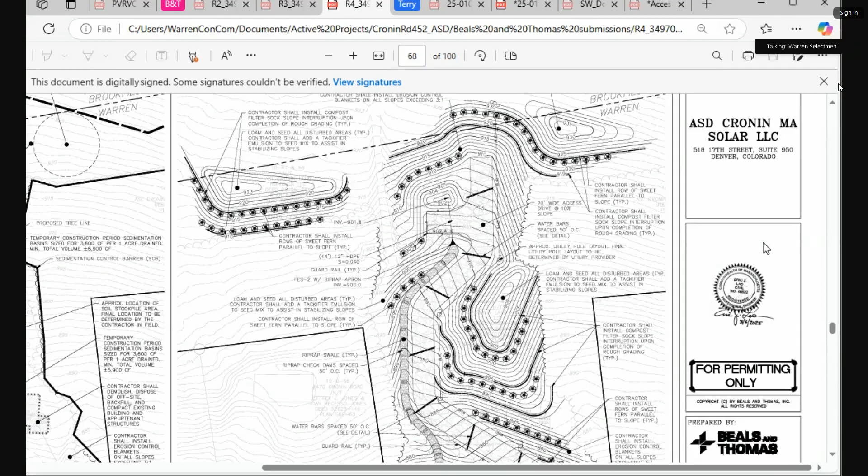Is the commission amenable to me reading Mr. Reynolds' remaining comments and talking through our proposed responses? Yeah, sure. Why don't we start with... I have, I can just — that is not it, this is it. I color code everything to help me out. Very good, because that's what we do.

That's what we learn at MACC conferences, right? I even do it on my documents. Oh, I did, yeah, so we'll focus on the yellow comments.

So we have general design analysis comment 1 still pending. Mr. Reynolds indicates that while the subject parcel boundaries have been revised, no subcatchment boundaries or routing is shown for the proposed solar project discharging to the Cronin Road site.

So we will be submitting updated subcatchment boundaries that do depict the area draining from the offsite portion of the separate solar project — the portion that would potentially direct water towards the town of Warren. That is going to be depicted on the next subcatchment drawings that we have, and we will submit those to Mr. Reynolds for review in accordance with this comment.

We'll have the pre-development and post-development conditions watershed maps — figure 1 and figure 2 — that will be resubmitted to address this comment. So I stated this in my email to you.

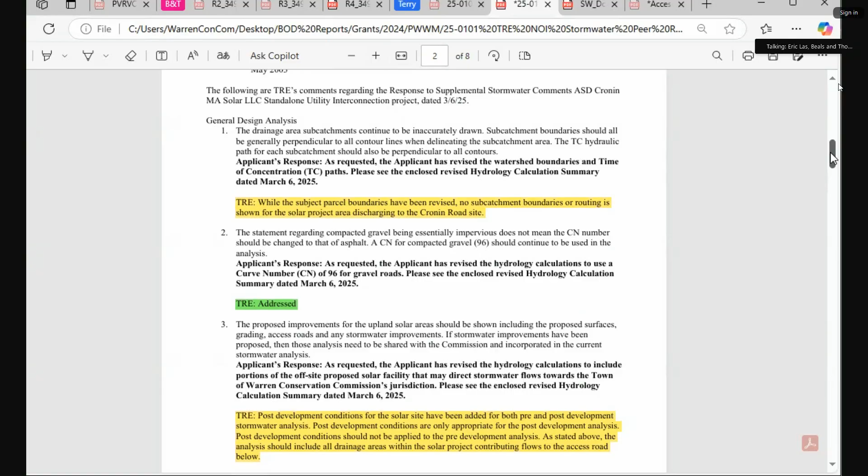So we're happy to convey that, but we don't want to initiate a whole new review of another project that's in a different municipality. That is not our applicant's intent - absolutely not. Our intent is just so you can demonstrate to us - that's exactly what we were looking for.

We need to be sure that we're all on the same page, and that small basin is going to accommodate what's coming onto the site. That's it. We're confident that we can demonstrate that to the commission and hopefully address your concerns about that.

Fantastic. All right, so I'm going to skip number 2 because it's addressed. Number 3 is the proposed improvements for the upland solar area should be shown, including the proposed surfaces, grading, access roads, and any stormwater improvements.

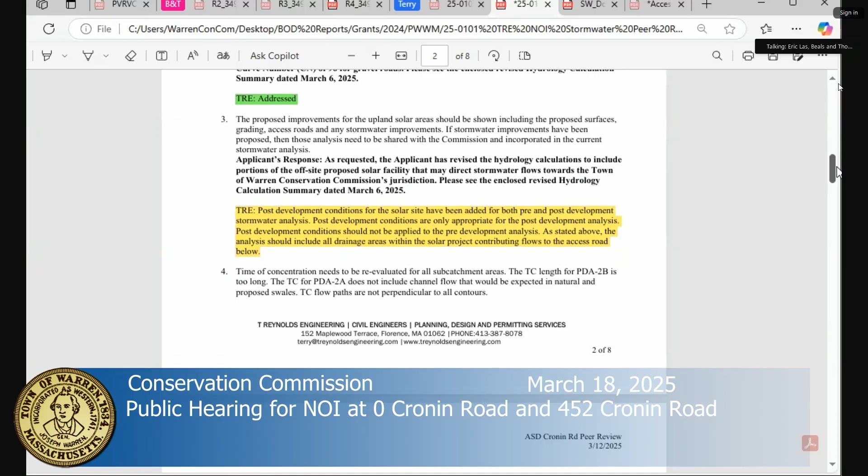It's stormwater. This one, I think - the previous comment, I guess it could have been interpreted more than one way. The way we interpreted it wasn't the way that Mr. Reynolds had intended us to interpret it.

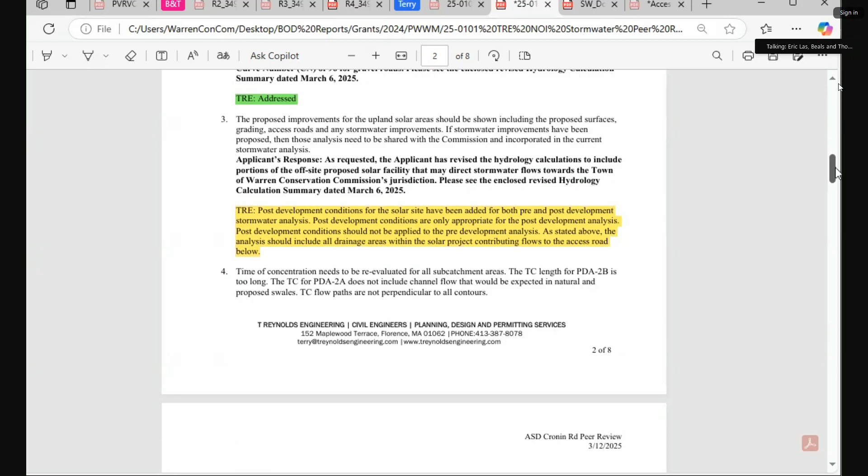So what we are going to do, basically, is show the offsite area to the east of the project, up gradient, in its current state without solar, since there is no solar up there. Then we will show in the proposed conditions that there would be solar there. That is the change we'll make, and we will provide the revised hydrology calculations in our submission later this week. This is really a different side of the same coin.

Numbers 4 and 5 have been addressed. And number 6...

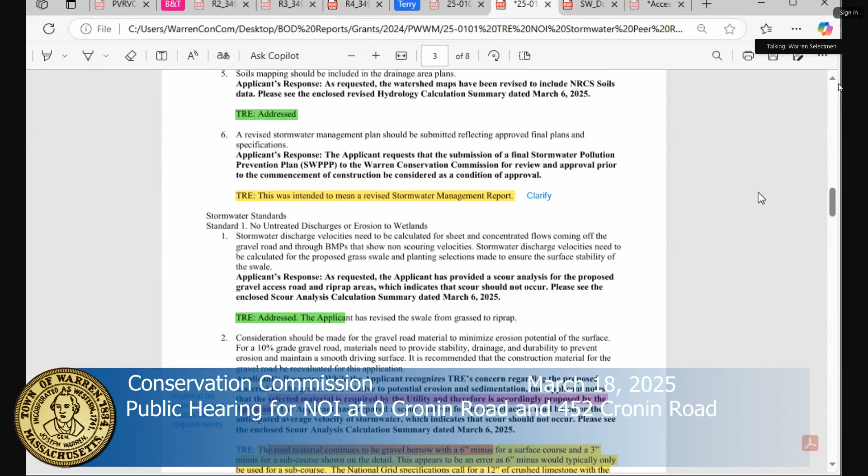Terry, if you are here - the stormwater management report, this was intended to mean a revised stormwater management report. Can you clarify what you were looking for?

This is just, as things are changed, the calculations are changing, the results are changing. The overall report, the document that you're going to put into your file, should be updated in entirety. That way, when people come back and refer to it, they're referring to what was finalized, not iterations.

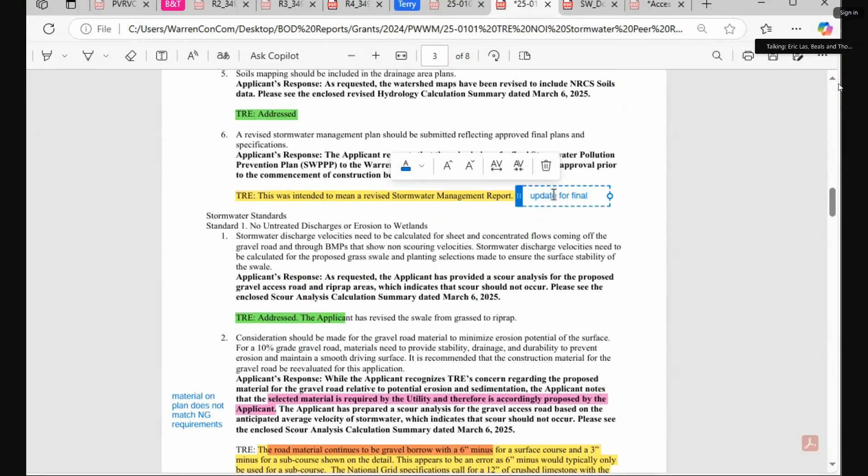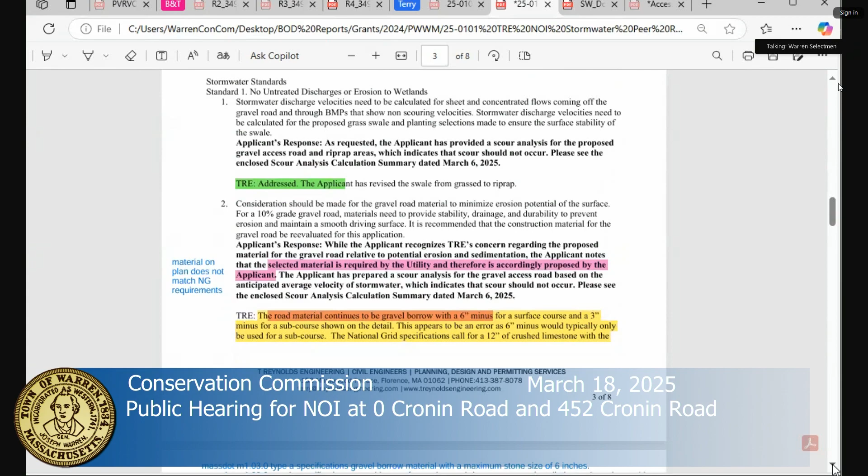Ah, right, okay, yes - that was our intention, commissioners, to submit that. I just wanted to make sure we were on the same page with that. Thank you. Stormwater standards, number 1 is green is go.

That means it was met. Number 2, consideration should be made for the gravel road material to minimize erosion potential. I'm not gonna read the whole thing. Ultimately, they're looking for - I understand that you have requirements from National Grid about the road material.

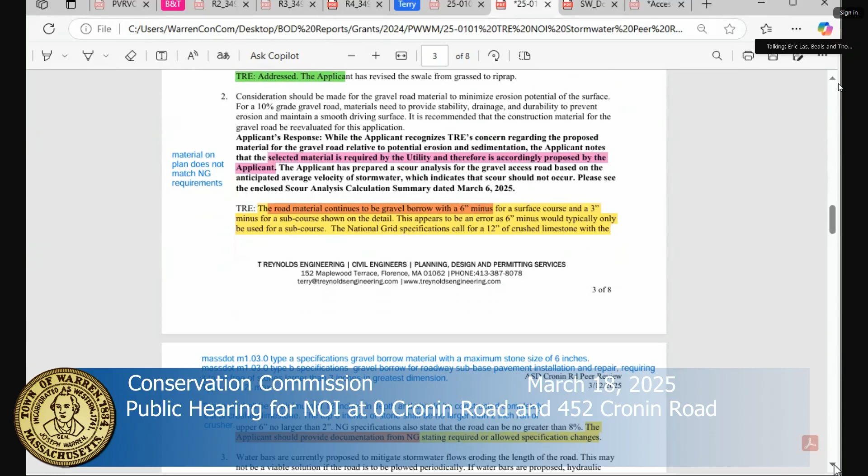Yes, the detail has been updated, Commissioners, to exactly match the spec from National Grid. I think there was one aspect of it that didn't match, and that has been updated.

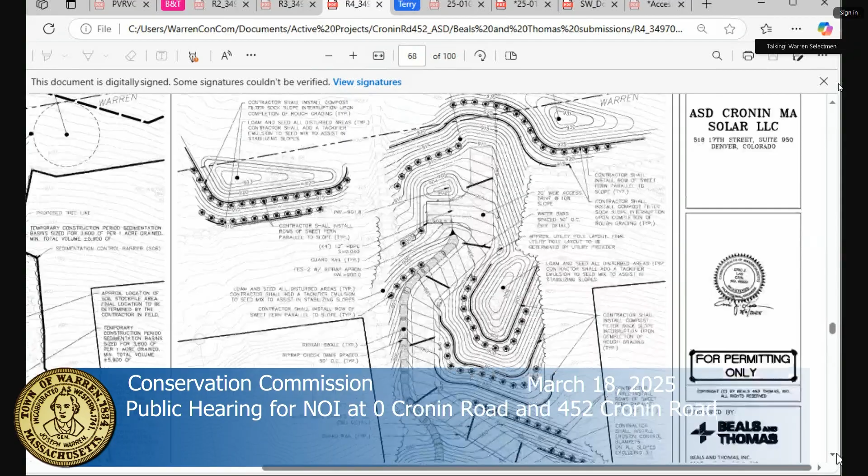Well, I didn't mean to do this. I had it sitting exactly on the spot right here for the road, and I think that I'm not sure if I agree with that. How do I get out of this, I need to be able to move this over. Oh, here we go, okay.

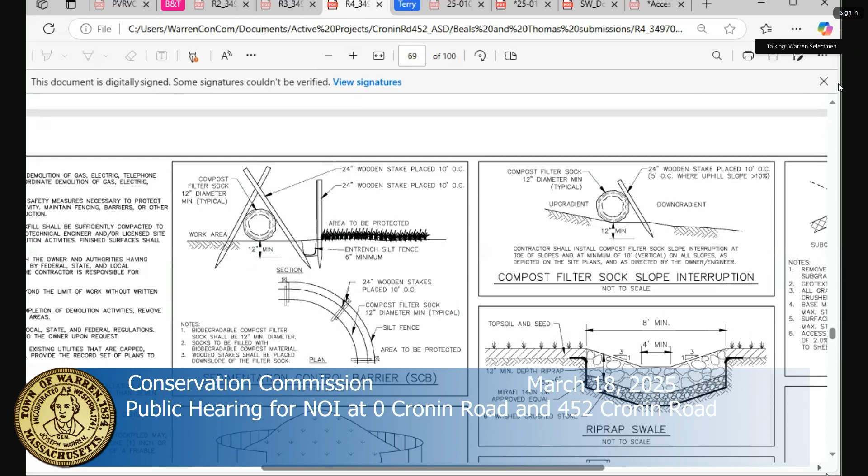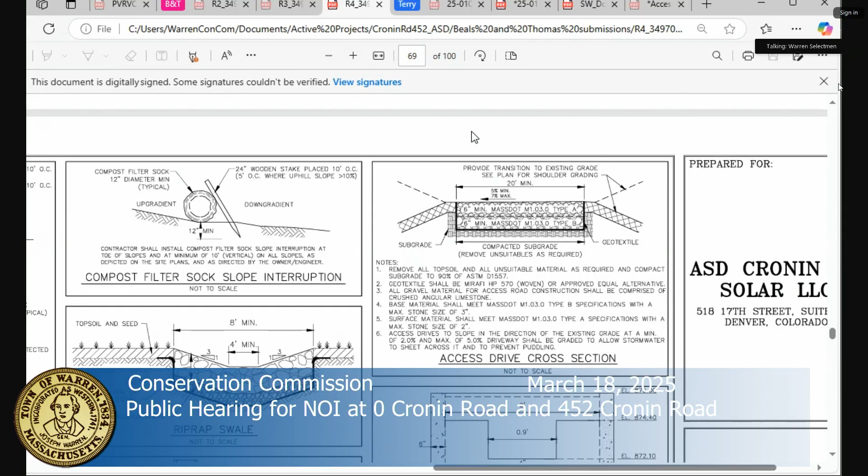So, my concern on this is that this drawing is fantastic because it shows the 6 and 6, right? From my experience, when people are on site and they're looking at a project, they're gonna go with a picture before they go with the words. It's just easier. But MassDOT M1.03.0 Type A and Type B refer to borrow and not to...

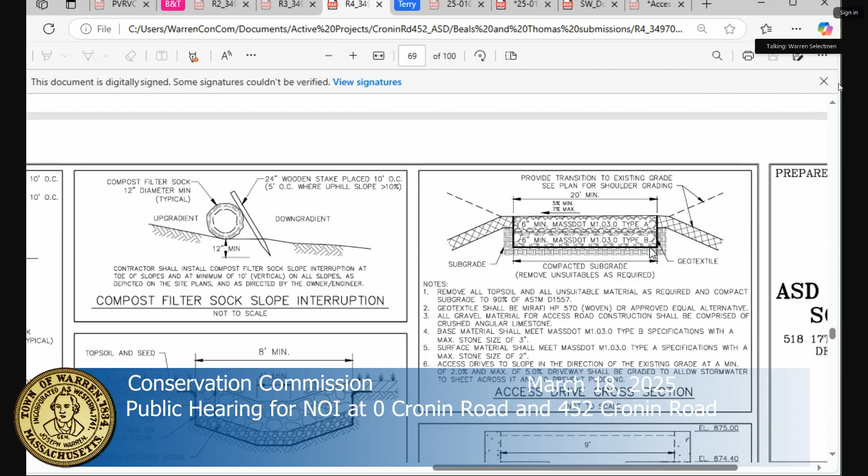Oh gosh. What is... crushed stone. Crushed stone, right, or crushed limestone. Crushed limestone specifically. So this here, if you can see my mouse moving on those two things...

I wasn't really entirely sure, so I ended up calling some people I know at Palmer Paving in the purchasing department, they put together the specs for road, and I asked them, what is, when you have M1.03.0 Type A, what does that mean to you? And they were like, oh, that's borrow, 6 inches and 3 inches. So if that's not - borrow is rounded stone and it's not crushed stone.

So I'm wondering if you could be more specific in this visual about it being crushed stone and not borrow. And if you meant something else with that, as in, it shouldn't have extra material in it, like it should be silt and clay free of loam, et cetera, et cetera.

Sure. Yeah. Hi, Madam Chair. Eric, is this the most recent iteration of the plans that Nick has been working on?

No, so as of today, right, our detail is different in response to the comments. So we have it depicted there as - so the 6-inch MassDOT references are gone, and it says now 12-inch minimum crushed limestone specifically, with no other specification there.

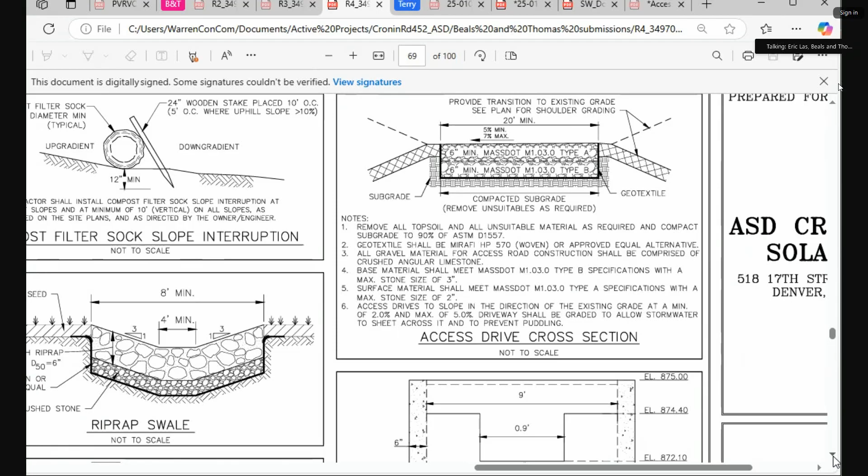And because National Grid has 12-inch depth of crushed limestone, and then the top 6 inches would have a 2-inch run of crusher. So they're very specific about that.

It was interesting, the people from Palmer Paving is who I spoke with. They were like, where are you gonna get limestone? I'm like, I don't know. They're like, it's pretty hard to come by.

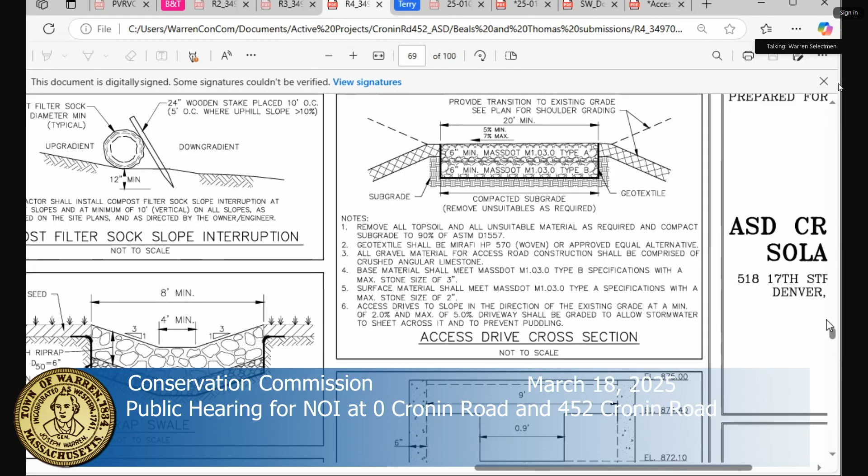But they also said that dense graded crushed stone was as close as you could get around here, and that would be better language than the M1.03.0 type A and B, because that's borrow, which is rounded stone.

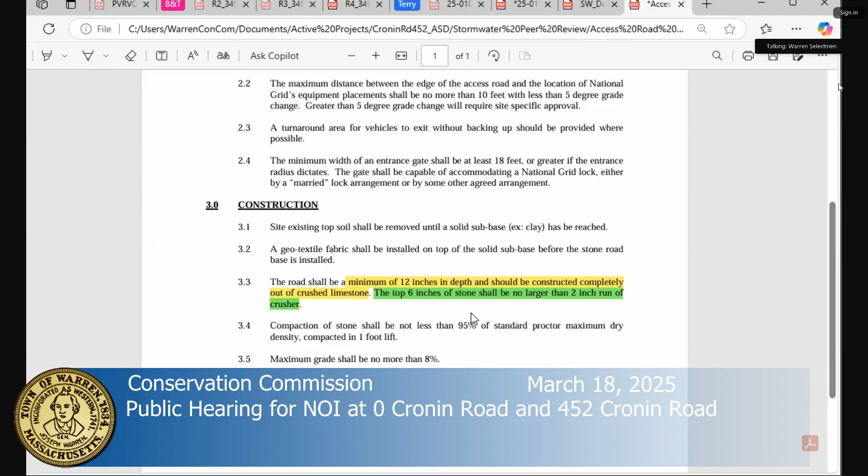Yeah, it appears you have a typo, because in your text you have 2 and 3 inch stone, and in the spec you have 6 and 3 inch stone. Anyway, this doesn't seem to match the requirements - it's gonna go back over here for National Grid. I think the bottom line is angular stone would be better than a borrow.

Yeah, no, thanks, Mr. Reynolds. Appreciate that. I'm gonna defer to Eric on whether we can accommodate the type of stone, but we really are trying to adhere to National Grid's standards, rules, and requirements for access roads.

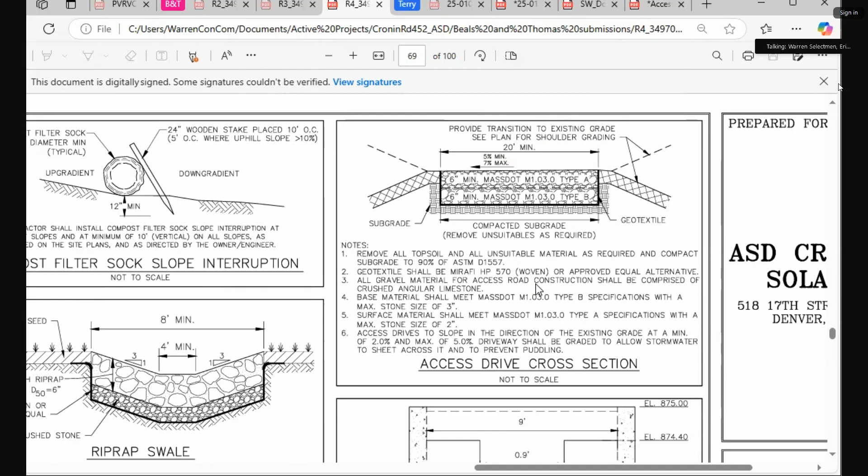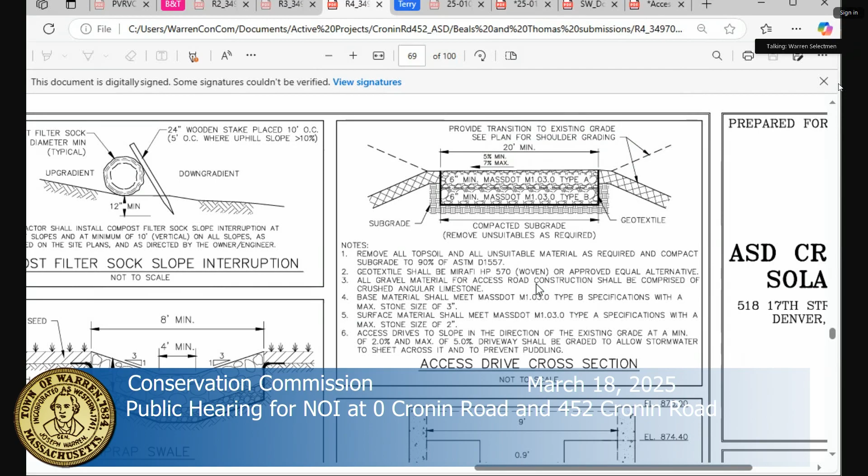Yeah, I think - well, yeah. I was gonna say that generally, I wouldn't even be looking at this, Corey, but it was such a hot button for you last time about following National Grid standards for the access road. It was a big hot button to the point where there were like almost threatening words about it. So at this point, I am looking at this closely because it's important to you, and if it doesn't match National Grid standard, I'm wondering why.

Well, I don't think it's necessarily like a small oversight. I think that what Nick had included previously did adhere to what they were requesting us to include. But I'll defer to Eric on what we will include moving forward, because that's what we're trying to match and deliver for.

Well, I'm just gonna belabor this a little bit more. This is the iteration before. And it is 12-inch gravel base, which is gravel borrow. Gravel borrow is not what National Grid is asking for.

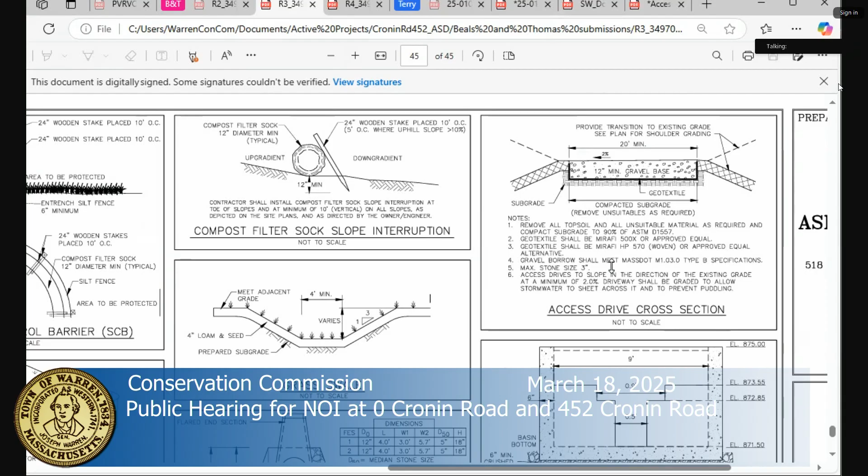So at that time, I don't think we had their specification at this particular point, because this, like I think you said, is two iterations ago. I have in front of my screen what we currently have drafted, but I will ultimately make sure.

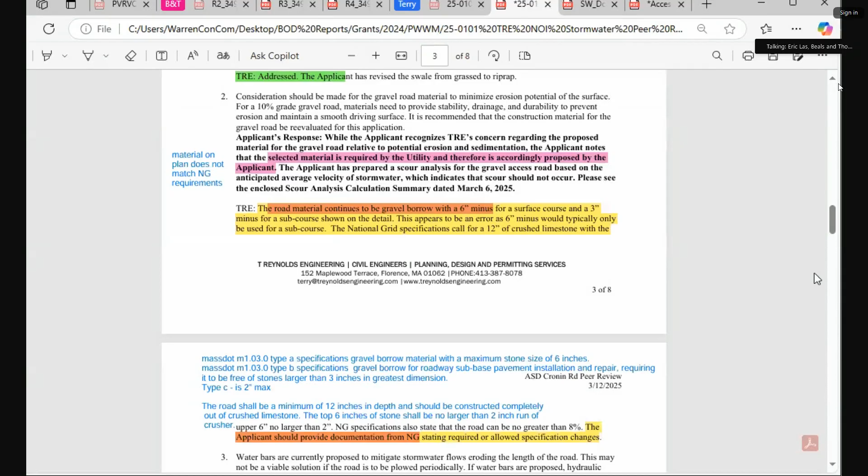Our plan going into this next submission is just to make sure that this detail, regardless of what Beals and Thomas has previously used for these types of roads, is going to match the N-Grid standard as close as we can seemingly get it.

But with your input as well, right? We're happy to try to nail this as best as everybody wants. We just want to get it right this next time, ultimately here. So...

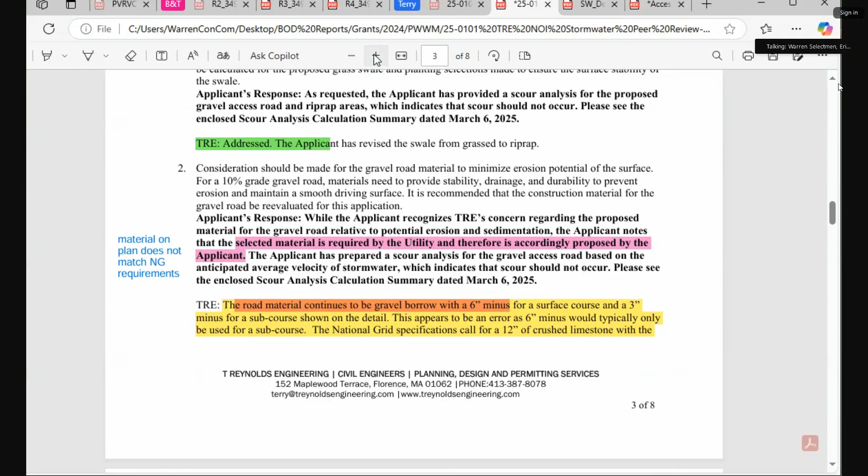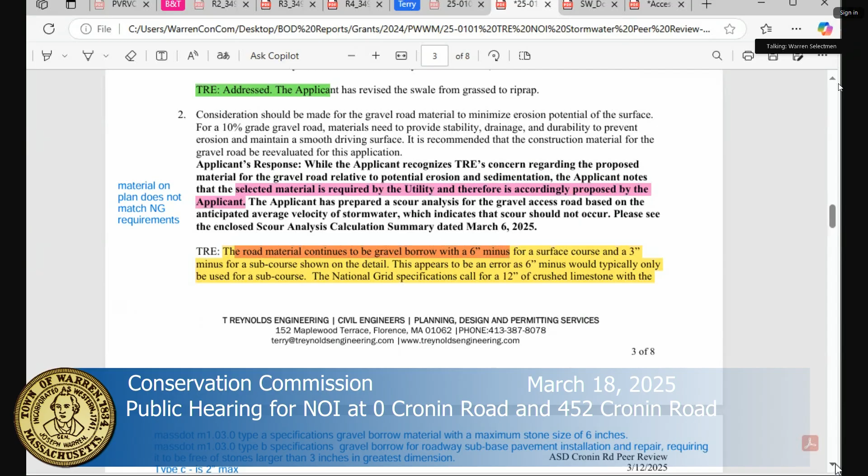It was such an important point, an emphasized exclamation mark point, that National Grid's requirements needed to be followed. And the details just didn't support that. And borrow is very different than crushed stone. So... that's it, I'm just going to leave it at that. I'm just going to move on.

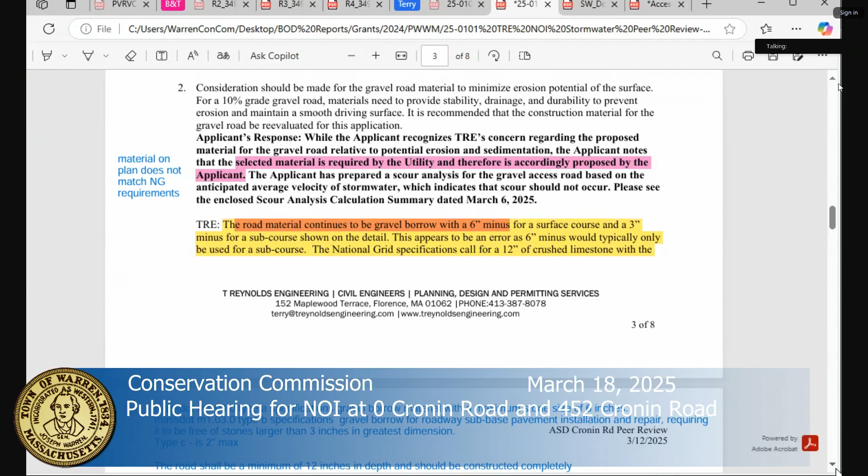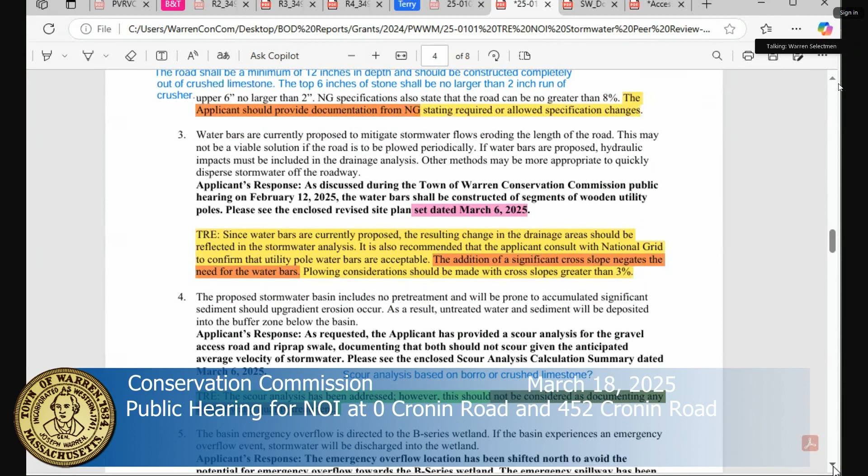And this is like all of my notes about National Grid. The 8%, you have at 10%, but I understand that you have a waiver.

Water bars. Oh yeah, so the road, I'm just going to go back to the plan. So the plan has changed in a couple of ways, where now we have a riprap swale, which is great, and the road still has water bars, or not water bars, it's the telephone poles.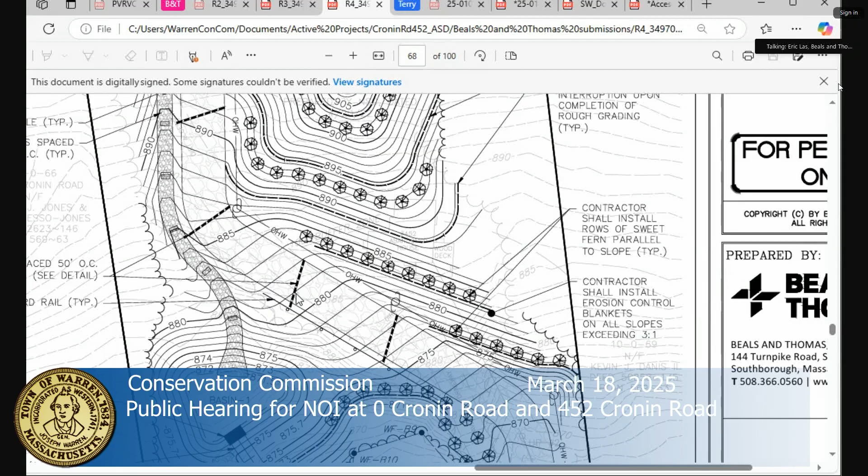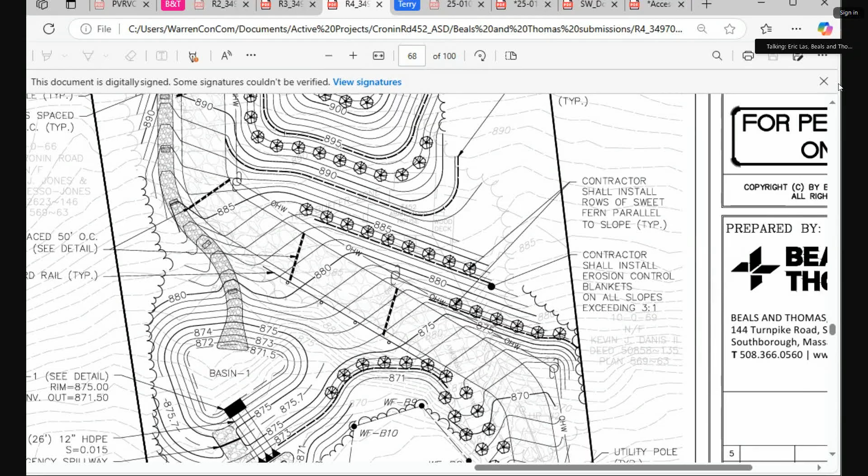So yeah, this is a very fluid situation, commissioners. I do acknowledge that what you're referring to there is now superseded. The swale has been adjusted. Mr. Reynolds and yourselves will have this to review this week. I could certainly share my screen to show where we're currently at. It's more representative of, I think, the direction we're trying to get to resolve the comment.

I will just say, while we're doing that, and if I have permission to share... Yeah, I just gave you permission. I have taken, and I'm not saying this to boast, I'm saying this to just tell the commission, almost 50 solar projects in Massachusetts to construction, and we have seen what works and what doesn't work.

And I do just want to acknowledge, even though we've removed the water bars, they are a very good BMP to have available during construction if needed. We have adjusted the cross slope of the road. I do acknowledge that this is gravel, that it needs to be paved, I understand all of that. However, they are a very effective tool for getting water to go off of the road and not sheet flow down it, scouring it, and getting it into the swale. So we have removed it, but I personally don't think it's necessarily in the project's best interest. I will just say that.

So, can you talk... well, I'm open, we're totally open to this type of thing. Our significant concern was that any water bars would be destroyed the first time a plow goes up the road. So they're primarily fine if they're properly installed using the telephone pole version, which we have done successfully on a number of projects.

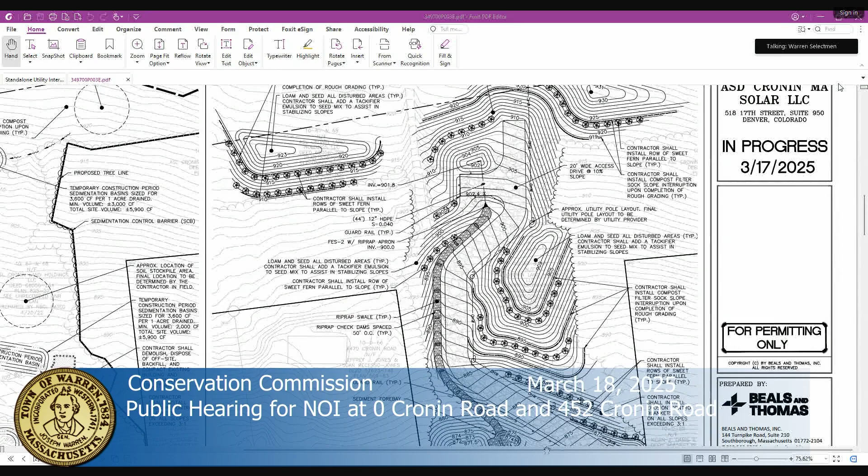The exterior water bars made out of crushed stone would immediately get destroyed during winter with snow plowing, and then rebuilding them just seems impractical. When anything becomes impractical, people ultimately stop doing them.

That was our concern. The telephone pole idea was discussed as a really good alternative, because they're embedded and less likely to be problematic with snow plows, but they will loosen up over time and perhaps cause erosion, with loose soils and material ending up in the wetlands or the basin. But it's significantly better than the exterior water bars made of gravel. So if you really feel strongly about this, Eric, I would be amenable to that.

You have also, it looks like, given the option for the road to be pitched between 2 and 5%. Who chooses the pitch? Is that a decision made in the field?

No, we've designated that cross pitch with our proposed grading, as you would see here, and we've provided a scour analysis that I believe Mr. Reynolds has accepted, showing that the proposed velocities will not scour the roadway as it's currently designed.

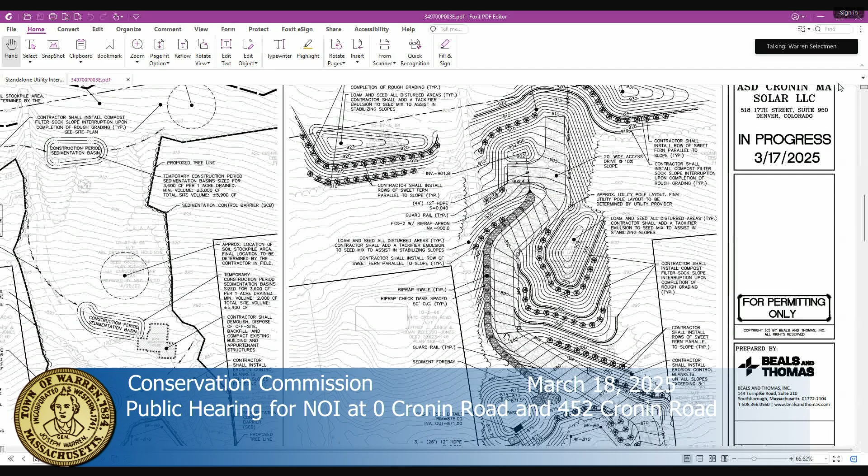And just to ask you this: as it's currently designed now, what's the side pitch? We are at—just bear with me one second, apologies.

The intent was to have Mr. Santangelo on this meeting virtually with me—well, actually he was going to be there in person. Our current cross pitch is—just give me one second, please.

I believe we're at, say, 5%. The intent was to get a greater cross pitch than we had previously proposed, in order to sheet the water off of the road, thereby not necessarily necessitating the need for the water bars. So that was really what we tried to do. I think we're at 5% currently. Yeah, if you had it listed on your detail.

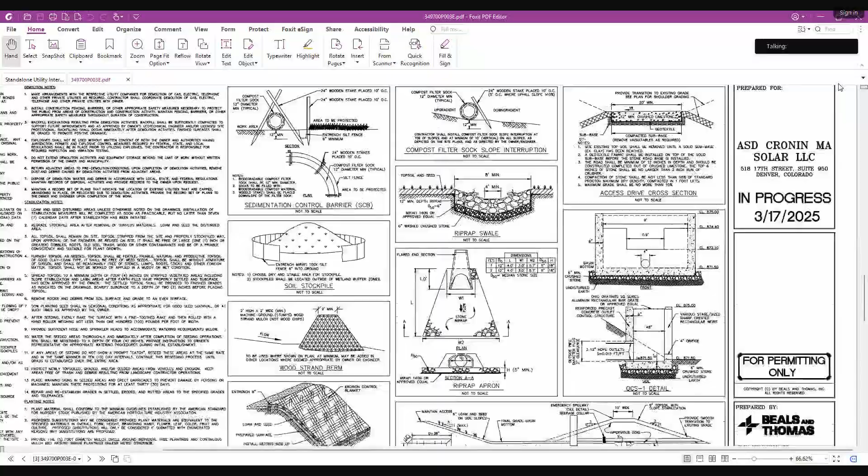We have 5% up, just let me pull this up. There—this is the updated version, this is why I was trying to share my screen. Just to show the current iteration of this particular detail, which again we will revisit this week to make sure it hopefully complies with all the input we've received. We have 5% here, and it's also 5% the way it's graded on the site plan I just had up.

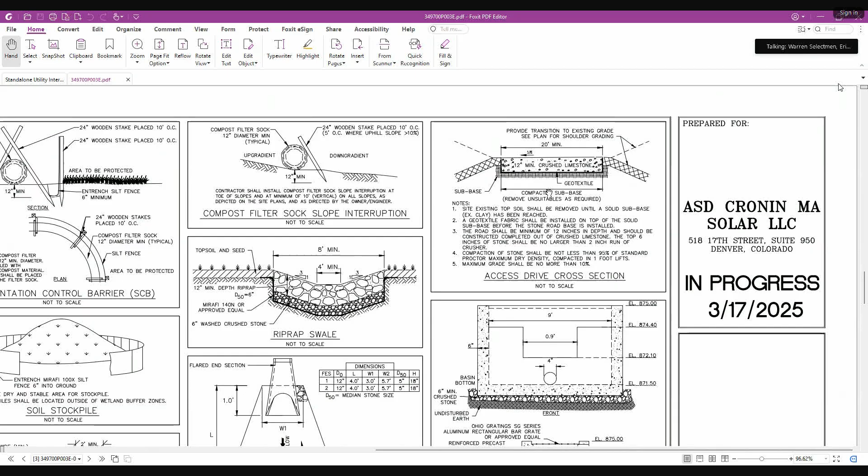Okay, I guess my question to you: at 5%, are you more comfortable leaving the bars in? Is it necessary? In my experience, I think it makes sense to leave the bars in at least until the construction period is over, and at that point they could be removed, but then there's a matter of stabilizing the area where they were taken out of.

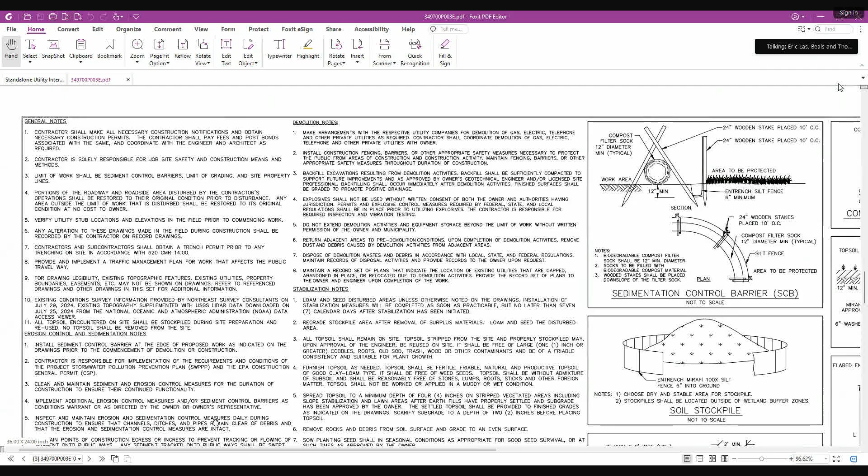I'm not against leaving them in. I think with the pitch together, it seems like a good solution. With them being buried, they might loosen up over time, but maybe that can be included in an operations and maintenance plan to check those and make sure there's no erosion behind them.

Right. Did you get that, Eric? Yes, that is a great suggestion, and that's one that I would certainly support as the PE on this project. Okay, great, so we will just make sure it's added to the O&M. We'll leave the bars there and the pitch.

And that would sort of do double duty with getting the water off the road, which is really our goal, as frequently as possible, so there's more opportunity for recharge. Correct. Great, thank you for discussing that and being open to keeping those in.

Yes, absolutely. Okay, so I'm back to the color-coded document. I just had a question on number 4: the proposed stormwater basin includes no pretreatment and will be prone to accumulating significant sediment should upgradient erosion occur. As a result, untreated water and sediment will be deposited into the buffer zone below the basin. You guys performed a scour analysis—my question was, was that done on borrow or crushed limestone?

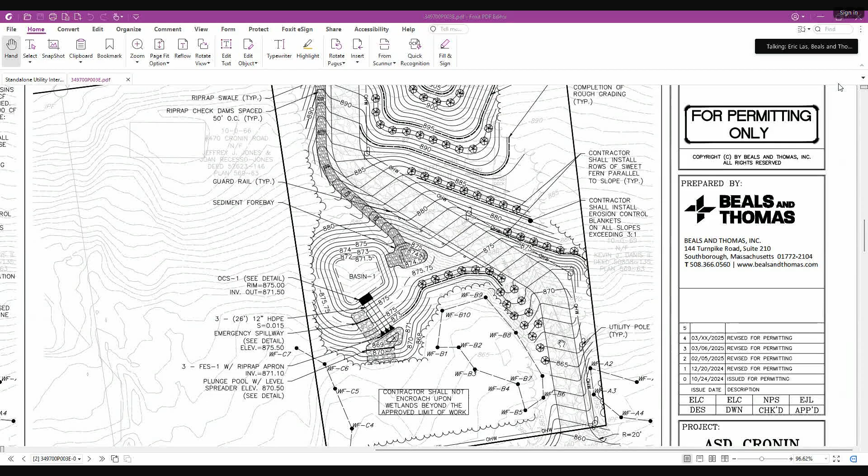So we were under that. Ultimately, what we were looking for, because of the steep grade, is to make sure the road material doesn't end up at the bottom. We've seen that in a few places where material ends up eroding in spots because of rilling wherever the sweet spot is, and there's continual reapplication of material and washing out that ultimately ends up in the wetland.

And obviously you guys don't want that because the road will have to be rebuilt. Correct. In response to this comment specifically, it leads us to probably the most significant change from the version of plans we recently submitted to the current version we're planning to submit this week: the addition of a sediment forebay to Basin 1. This is not something we had included previously. The swale had entered on the upgradient, eastern side of Basin 1, and now it wraps around.

It has a couple of benefits. Not only does it have the sediment forebay that would provide pretreatment for flows coming into Basin 1, but given it's wrapping around the southern side of Basin 1, it's actually going to pick up even more runoff from the gravel road as well. So twofold benefit there - that's one of the more substantive changes we're planning to make to the plans the commission will see next. We hope that will help address the comments regarding standard 4 that Mr. Reynolds had raised. Good, okay, thank you.

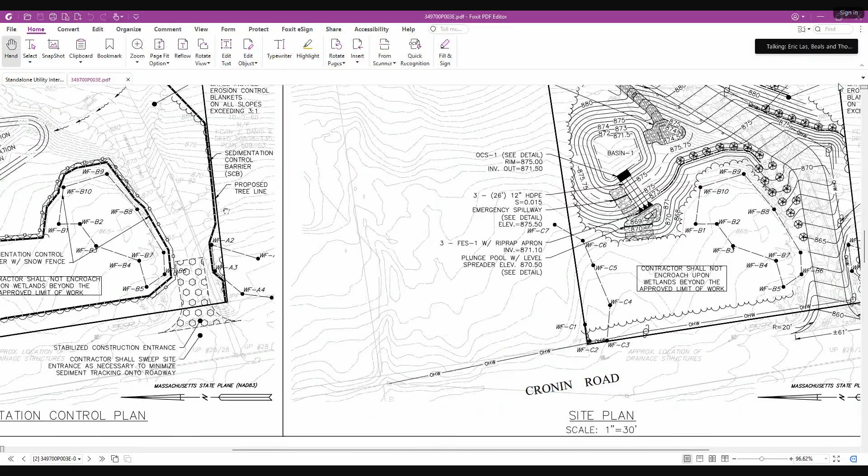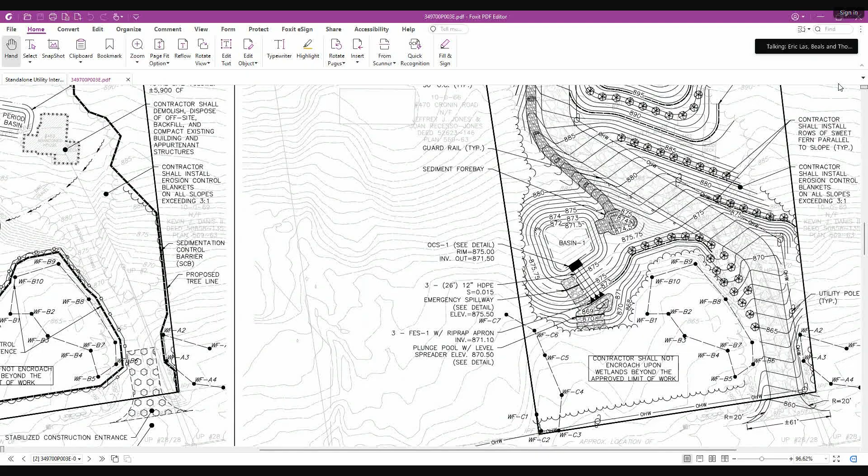If we want to, typically what we would do is that, but I don't know if I was at that particular hearing. Most commonly, what happens in many cases, if there is going to be a permanent basin, is that the temporary sedimentation basin, if it occupies a portion or all of that footprint, is at a higher elevation, so it's not quite as deep. It's sized to meet the NPDES requirements, but then it allows that basin to be over-excavated to completely remove any sedimentation as well as any impacted soil to get down to the proposed grade.

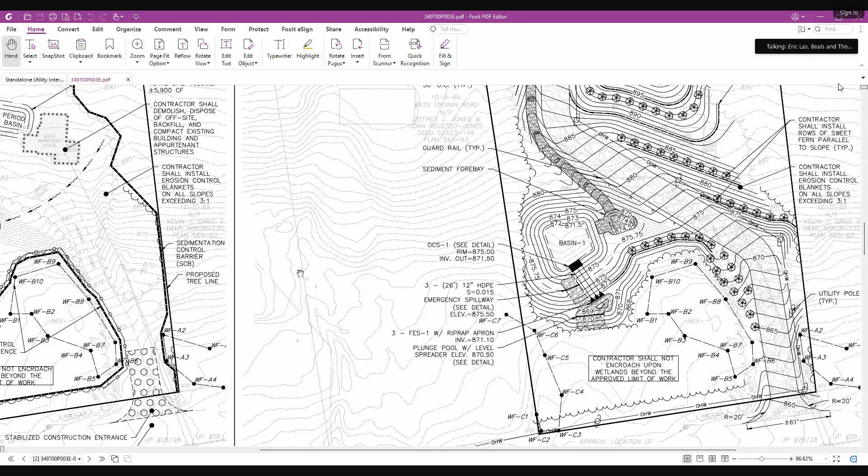Now here, this isn't an infiltration basin. We've done that even where we do have infiltration proposed. So it would be better to have basin 1 be more like it is in the permanent scenario, with an actual outlet. But in terms of meeting the NPDES requirements, one of the sizing criteria here does meet that.

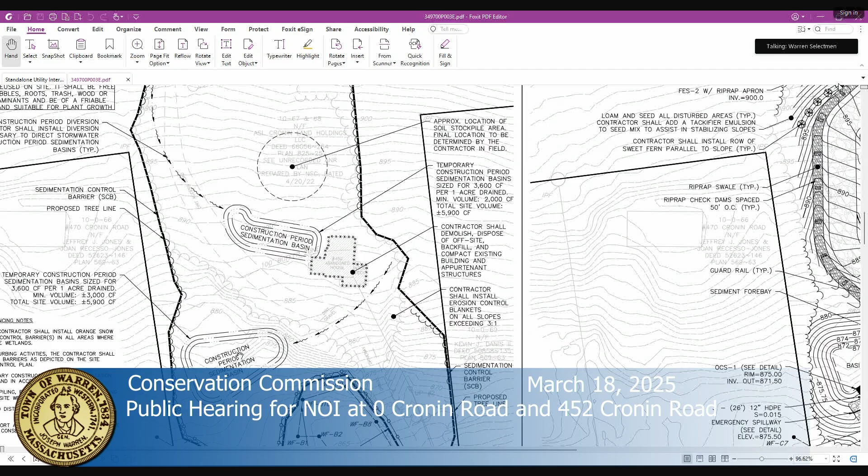Do you have a requirement, something about once it reaches three-quarters of the way full, then it's to be pumped out, and the material, maybe through floc logs or something like that, to eliminate the fines? That's something we have seen quite frequently for construction basins, that it just needs to be manually pumped, if it's going to be raining heavy rains and it's going to fill up, you just need to pump it out onto floc logs, get rid of the material.

And that's, again, it's in here, and we're getting to it in the next comment, actually, the SWPPP being a requirement for the commission's review as well. That's typically where we would get into that level. I mean, it's hundreds of pages. Yeah, I know, typically, right? So that's where a lot of that criteria is typically spelled out in a bit more detail. I do understand trying to get as much of that on here as possible, but...

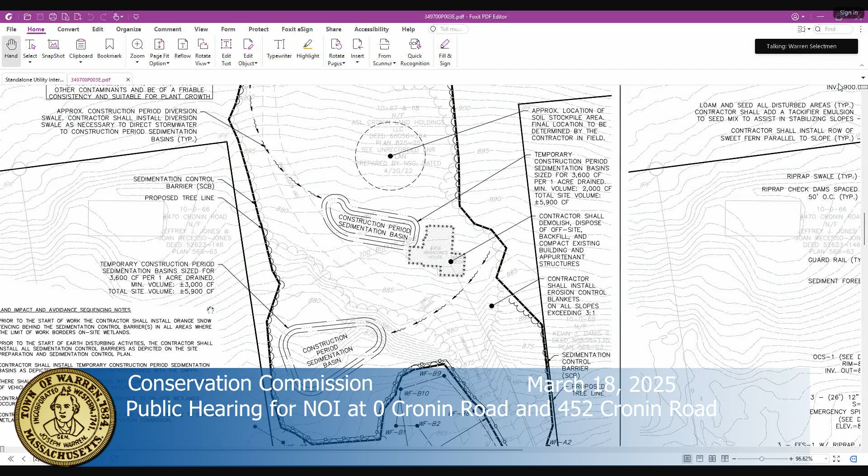So one of the things that I... because it's a document, somebody's got to read it. But oftentimes, from our experience, and I can tell you that I only have 12 and you probably have hundreds, being on site, what I've seen is that if it's not on the plan in a picture form or like in a broad note, it gets ignored because there's a bunch of people, this is like a small project. I totally get that. But oftentimes, quick, fast, visual form, and then this is what needs to happen, because otherwise, if it's impractical, it's not going to happen, which I understand pumps are often impractical.

Anyway, I guess I'm voting to have either a note or some kind of something on the plan, instead of buried in the middle of a 700-page SWPPP.

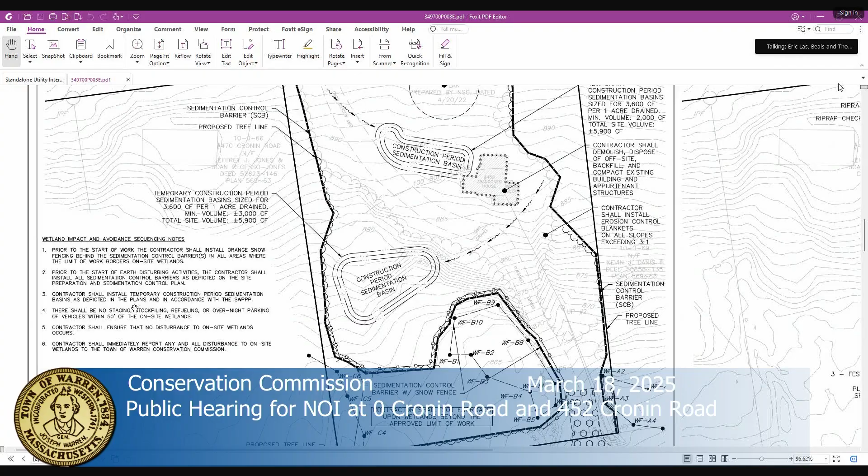Yeah, we can certainly try to continue to add to the notation that we have on here. We did add, coming from the first hearing that I was at, the wetland impact and avoidance sequencing, which was a big thing that wasn't on our initial set of plans. So we've continued to work on all the notation on here, and we'll take another look at it this week, commissioners, before we submit it for your review.

Okay, thank you. Eric, would it make sense for that to be an item as a condition? Well, I think it will be, Corey, really, and it is covered under the next comment we're getting to, but I think there's just a few additional notes we can put on here to address the commission's concerns.

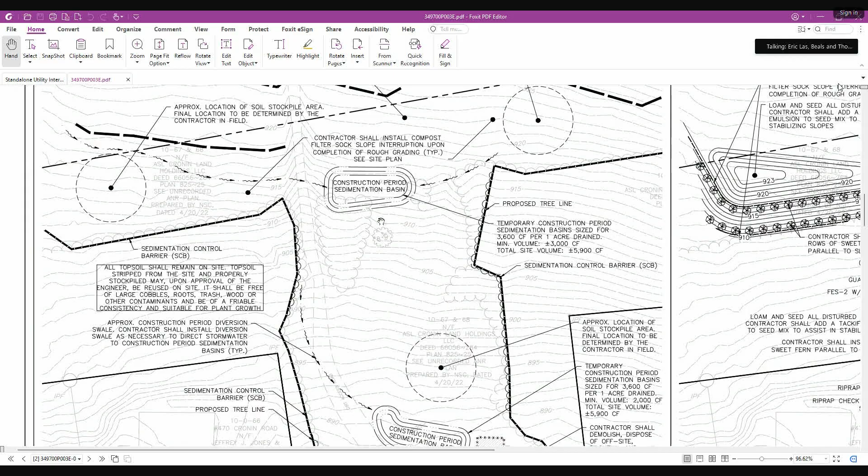Okay, I'm gonna have you stop sharing. And I'm going to go back to our... Okay, then we got that. Temporary erosion control measures, we have acknowledged, addressed.

Oh, I'm just curious, do you have on your O&M, if there happens to be sediment built up in the riprap swale over time, are there processes in place for sediment removal in the riprap swale, or does it all need to be removed?

So we have what we refer to as the site owner's manual, and we had a version of this dated March 6th that was submitted to the commission, and there's a section, 4.2.1, that deals with that.

In the interim, what we're seeing with today's technology is vac trucks. They're not necessarily always just used to remove sediment from catch basins and water quality units. They are also used—we've seen them used to remove sediment from the bottom of ornamental ponds and things of that nature. So they could certainly be used to remove accumulated sediment from a swale.